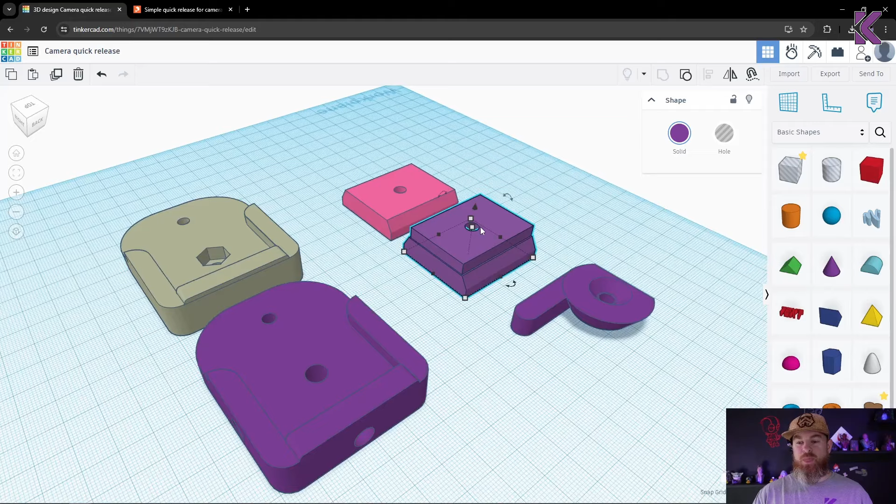Now, after logging into Tinkercad and importing my files, I'll show you what I've done and just quickly how I did that. So my first thing was to extend this base right here. Now it used to look like that—that's the original part—and I just needed to extend that face.

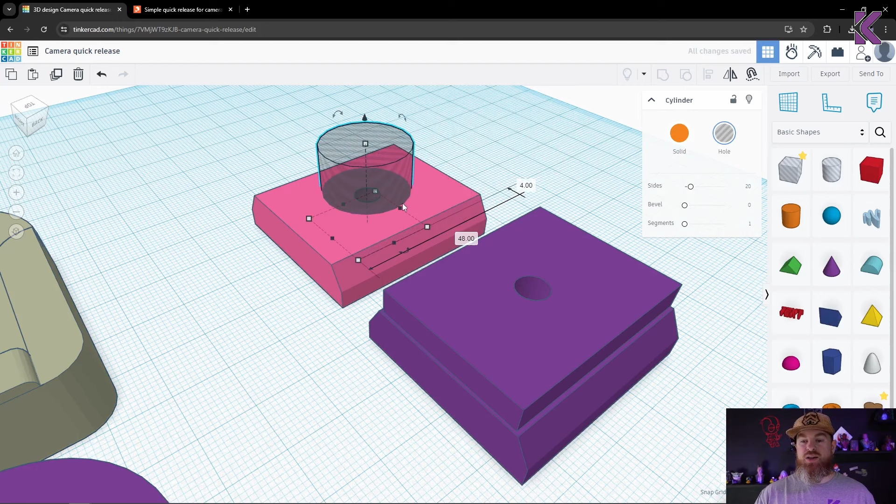It didn't really matter how this looks because it's a practical print. So the way that I did this was the first thing that I needed to do was make sure that I still had this hole when I'm done. So I took a basic shape and put that in the middle, and then I matched it up to that hole, the existing hole.

Now I won't be doing this with exact measurements, but you can see what I'm doing pretty easily. So I'll put this in the middle like that, and then I'll grab a box and put it on top of the part, and I will scale this to however much I needed to extend that box with, to be the entire part like that.

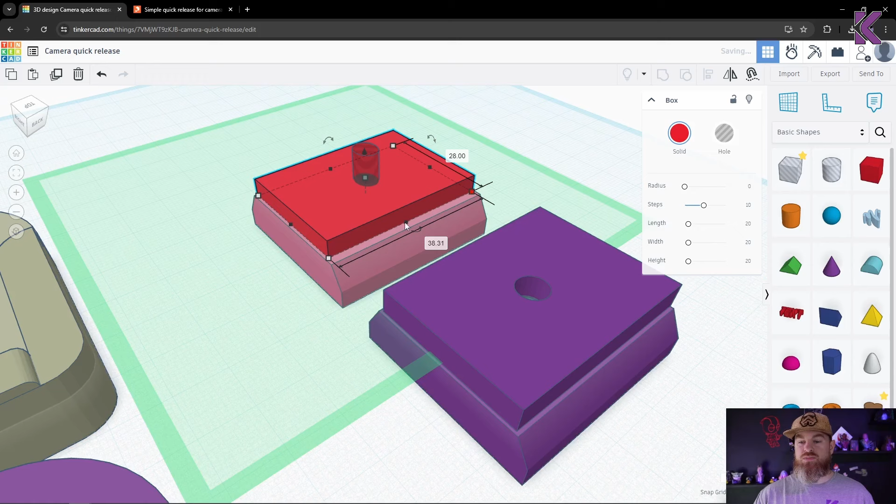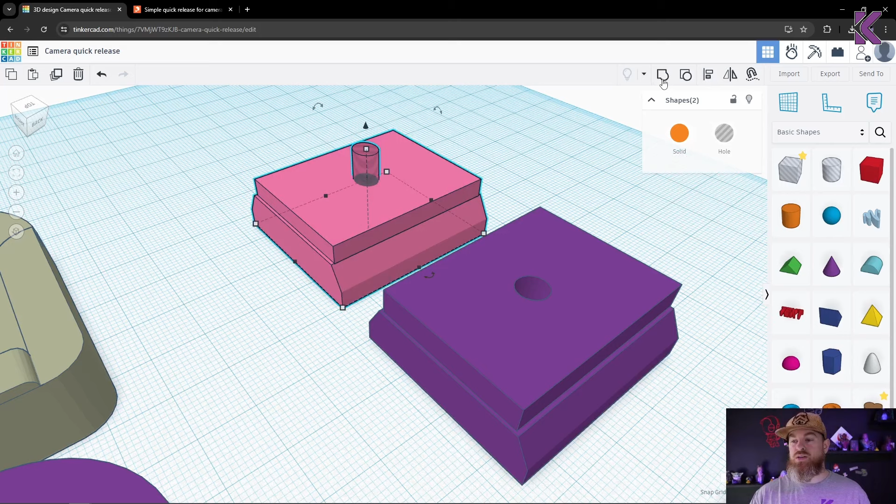Now this is not perfect, and it doesn't have to be—it's a practical print. So what I'll do is I'll first combine these two boxes: press the bottom box and the top box while holding shift, and click the combine tool, and then I'll click the cylinder and then the box and combine again, and that is my part done. Not perfect this time, but I didn't even measure. So let's get rid of that so I won't print it at all.

And look at what I did here. This was a little bit more involved just because I had to remove stuff and then add stuff back, which is just one more step than what I just did.

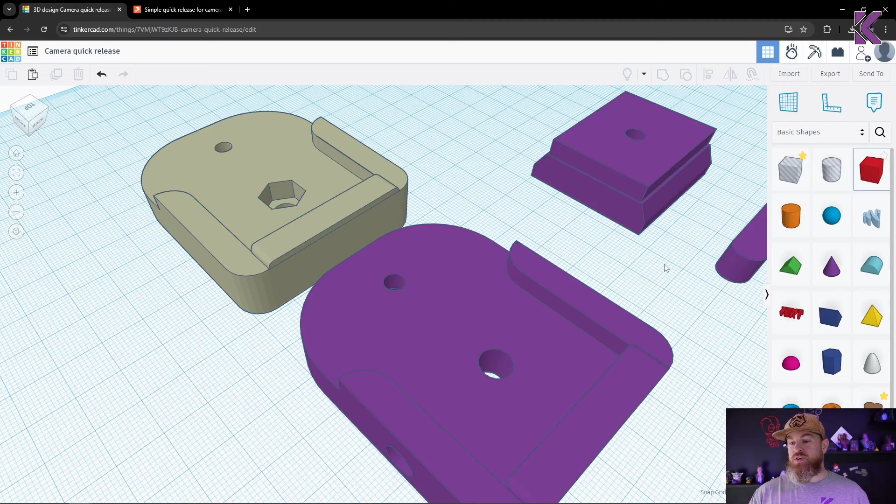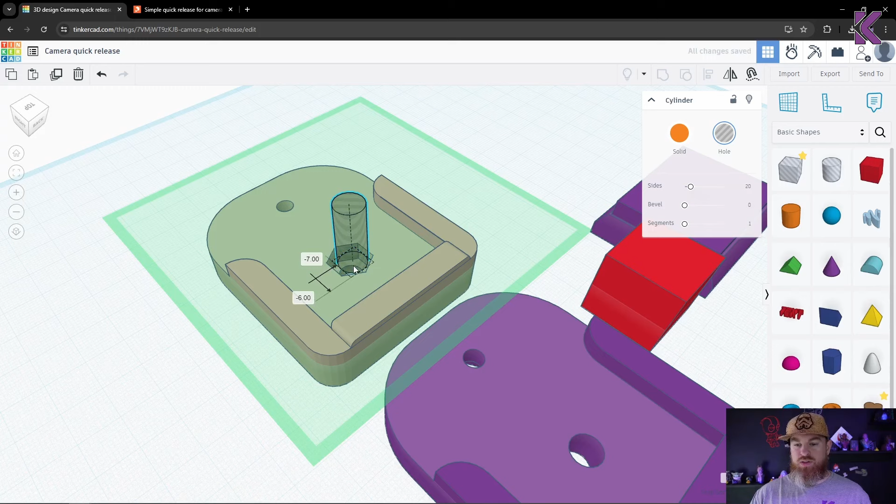The first thing that I did is that I grabbed the hole again, and let's put that there, and let's try to make it roughly the size that it needs to be. So I'll put it in the hole and make sure that it goes all the way through.

So now I have the position of the hole, and what I just need to do now is delete that part, and that's quite simple. I just need to make sure that this box is bigger than the hole that I want to cover up and the same height as the rest of this part.

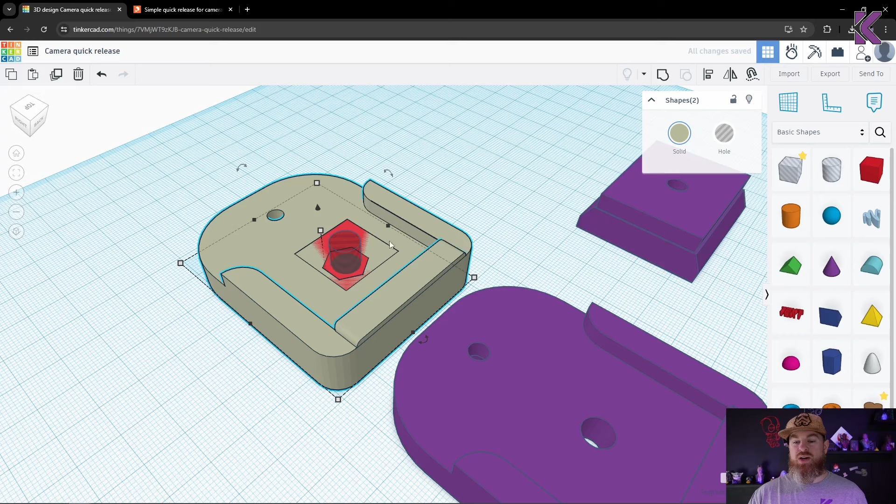Now I'll select the inner box and then the outer box and hit combine, and then both of them, the cylinder and the box, and hit combine again, and there we have it. Now I just went one step further and added some more holes for heat inserts, and that's the only change that I did.

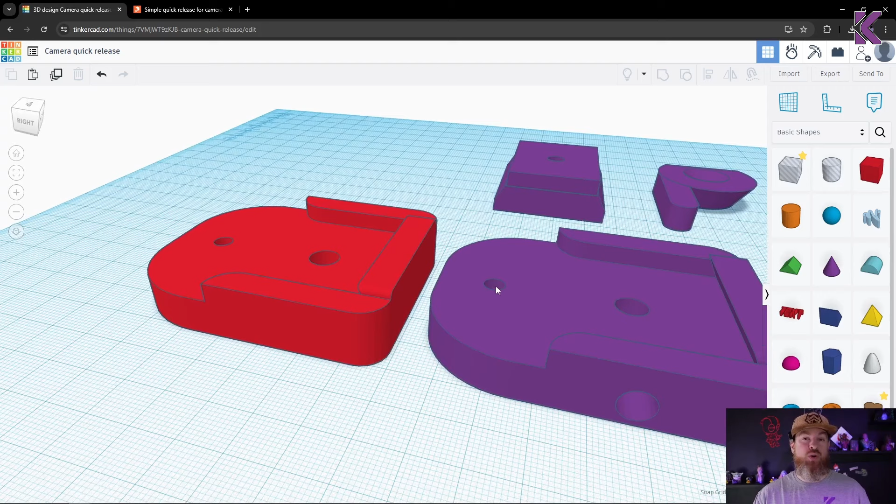Those two little things made this from an unusable part that I needed to order hardware for into something that I can use right now. So let's get this printed and put in some heat inserts, and we're done.

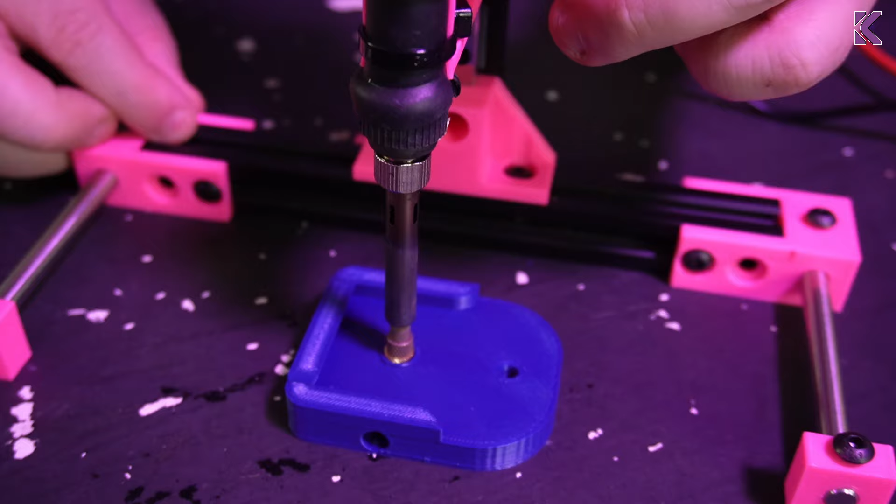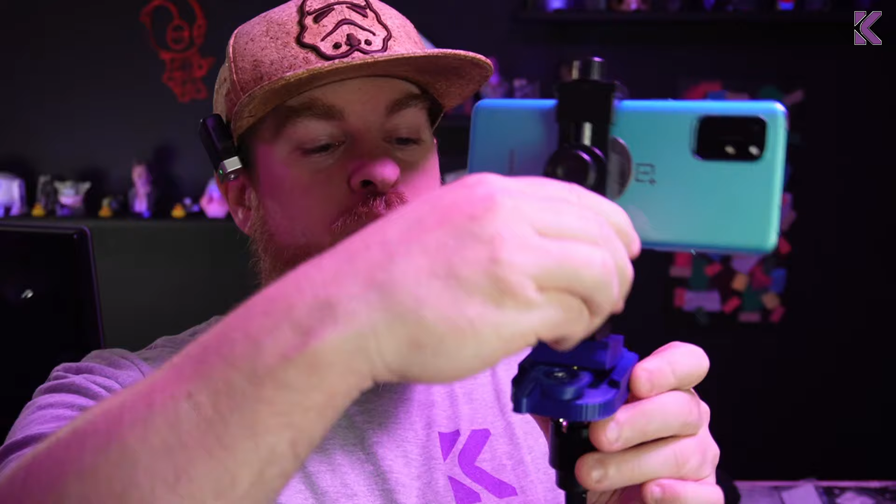And there we have it. I have the printed parts, heat insert is in. Now all I need to do is add that 1/4-20 bolt that I have into the extended part. And I have a nice little quick mount for my phone or my camera or my lights or anything.

So I hope that helped you in realizing that if something just needs a little bit of tweaking, you can do that. So have fun, I guess.